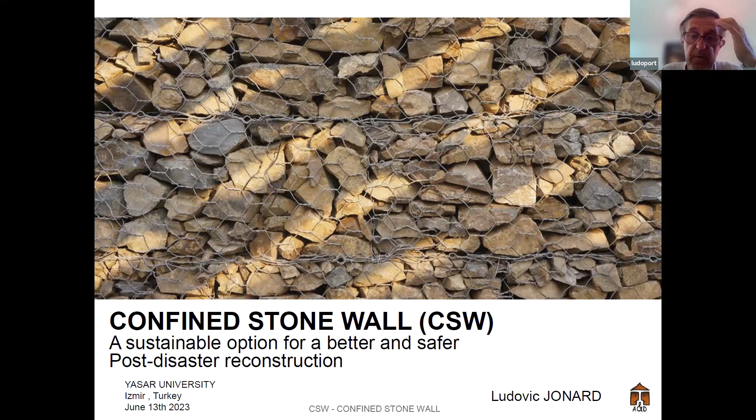So first of all, just a presentation about who we are. We are an NGO. We are based in Paris. We are called Architecture and Development, and I think the name speaks itself. It says that we are architects, basically.

We have also been academic. I was myself a teacher for 10 years in my school, and we have also this idea of teaching and learning from others, and also teaching back to new architects how can they use different options and alternative solutions for developing countries. I put developing countries in terms of non-advanced countries in terms of construction, which is not, of course, the case of Turkey. But we decided that we had to build a new concept and new approach for those specific countries who cannot afford the high standards, who cannot afford to have, unfortunately, good expertise and still need to have decent habitat.

So the NGO has some expertise with technical aspects. We also do some advisory to reconstruction projects, can be like donor agencies, or can be some foundations who want to do projects and they don't know what to do. So we advise them to make some surveys, to make some assessment studies, feasibility studies, and we also do design and project management, but not as a company, not as a private company, because we are an NGO, we are a non-profit organization, and we don't have at all the same capacities.

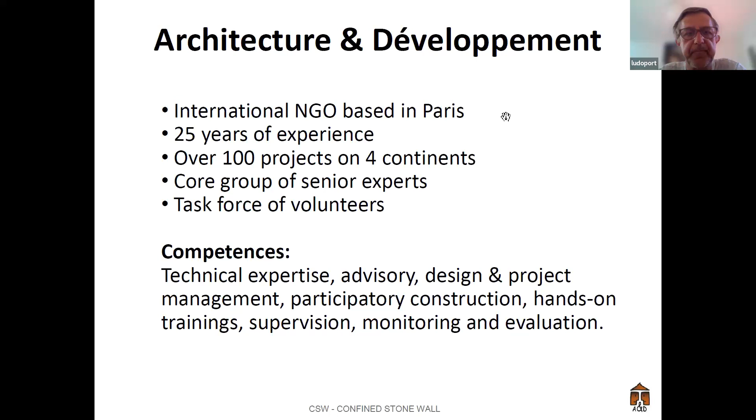What we want to implement as an NGO is to create processes which have a holistic, global approach on sustainable habitat. We think habitat is a right for the people. Besides living in poor conditions or being affected by a disaster, people deserve to have a decent habitat, and when they are affected, they need a decent reconstruction. They have a right to be properly reconstructed, which unfortunately isn't always the case.

So we are not only technicians. We do not produce pure architecture. We also have a social agenda. And of course, it has to be cost effective and affordable for the people.

Nowadays it's becoming very crucial to have environmental concerns, because sustainability relies on non-pollution and impact on the environment and nature, which is a big problem today, not only in regular building processes but also in post-disaster reconstruction programs. So what we want to do is improve the quality of the built environment.

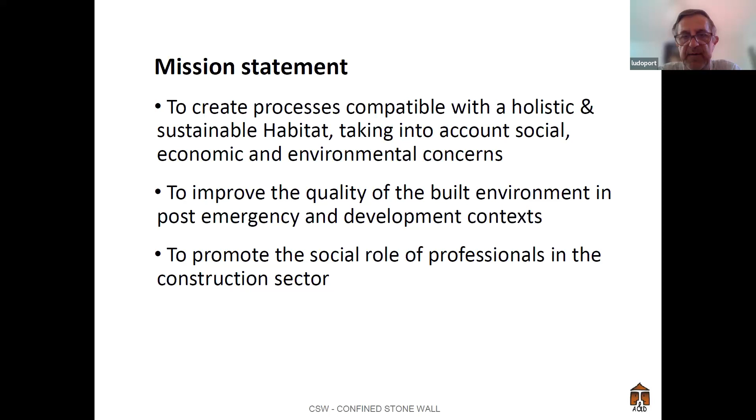So let's come to the issue of post-disaster. I made a brief list of issues that we've encountered during the 25 years of activities we've had, because post-disaster is a crisis period, and we have witnessed many problems about what to do after a disaster, and an earthquake is often a strong one.

What is the problem caused between the need for emergency and the emergency of building back better, as we say. For us, for architects, there's no solution for emergency. Architecture is not an emergency solution. It has to be in the perspective of long-term reconstruction.

But there's a gap between what to do in emergency, when people are left alone without shelter, and what to do after a few weeks when the victims are safe, covered, or hospitalized. What do we do with people who have no shelter after one month? And how long will they stay in that position until they have what we call permanent construction?

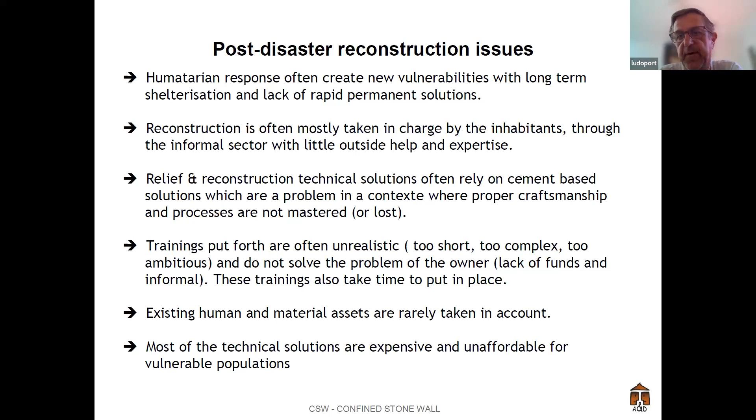Another critical issue is that many of the ready-made, nice, smart solutions are very expensive. It's not cost-effective, it's not affordable for the people. Because most of the time the people will have to pay for their home structure, they will rebuild badly, and it creates new vulnerabilities.

Other issues, and I think it's more related to Turkey: when the earthquake or disaster happens in rural areas, deserts, semi-desertic areas, or mountains, there are many issues about people migrating to the cities because they don't have a perspective of rebuilding in the same place. There's a tendency for the population to flee away to suburban parts or cities, which is not good for urban planning and management, and it creates family divide and economic divide in some regions.

So social or low-cost housing is not easy to plan, and rural families do not accept these standards because they are used to single houses, not multi-story buildings. It's a great gap, and it's a break in the life of those families.

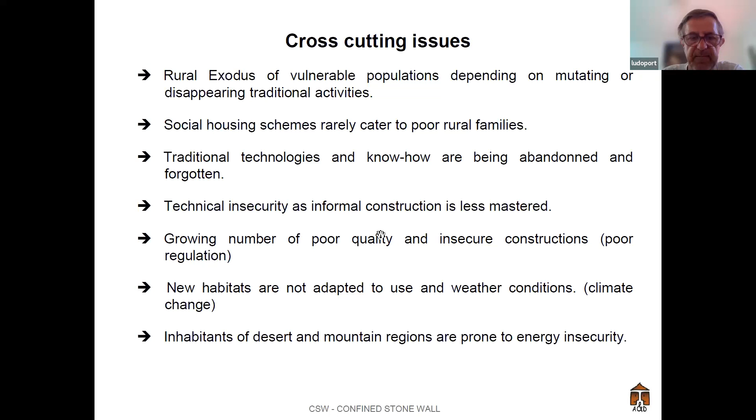There's no magic and no miracle. It's a long way to understand what can be done, and each disaster or context is new, so we have to rethink the strategies, the approach, and the methodology for choosing the best technology, and not only the technology, but the overall approach to deliver appropriate habitat. So let's talk about alternative technology.

This has to come through a series of questions, not all of them, but at least some. What is the purpose of alternative technology? Alternative technology is a response to bad housing, energy insecurity that I just mentioned, and climate hazards.

This is actually the basics of what we would call decent housing. The right to decent housing for all, which means wherever you come from, whichever country, whichever ethnical background you have, or whether you are rich or poor, you should live in good conditions, at least human conditions. So technology has to address those issues, and alternative technology is also something you can source locally.

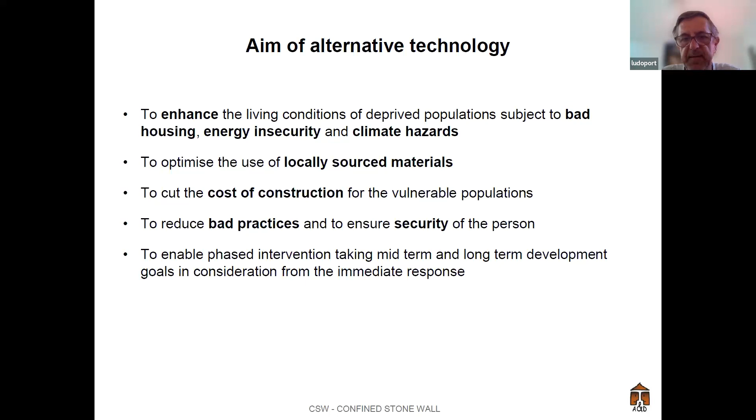When you have a disaster, you have lots of international solidarity and money coming from governments or international organizations at the beginning. After one or two years, or even after six months — like in Turkey, I don't know if there's so much money available today. That's also a reason why we should go for technology that ensures the house delivered can be properly managed and maintained long term without much effort.

So let's go to the core issue — one of the alternative technologies we have experimented with for the last 15 years. We call it confined stone technology.

Not gabions, for a very simple reason — it's the same, sure, but we call it confined stone wall because gabion is the technical word used for public works. Usually you use gabions for retaining walls in the mountains, or for dams. So we call it 'un mur poids' in French.

I think it's a weight wall — it uses the weight of its structure to withstand and retain the forces that come from a slope in the mountains. So it's a static definition: what a gabion does is stop the force that would cause the slope or part of a mountain to slip. With its strong, heavy load, it's a load wall — the load creates the strength, but it's not active.

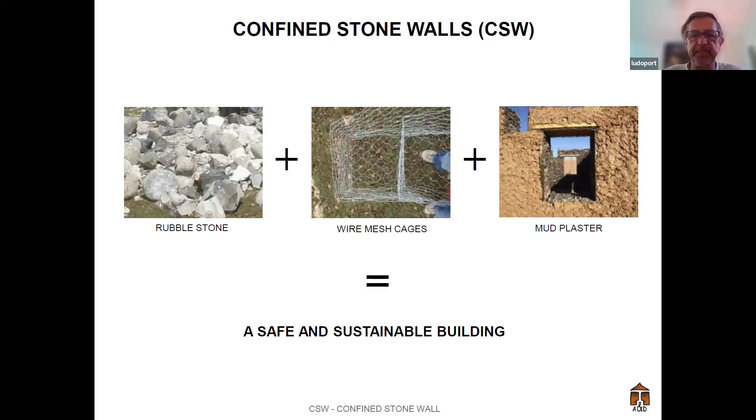And there was no access. Logistics was very poor. There was no material affordable. Cement and iron was very, very expensive, and no roads—only the donkeys would come, and so on.

So we said, what to do? And we realized that the people were traditionally building their homes with stone, limestone, and they had some kind of reinforcement for earthquakes, but not really.

And we said, okay, there's a huge amount of material already—stones were available—and of course many of the houses had collapsed, but the roofs were very heavy with earth. So the weight, the load of the roof, had collapsed and brought down the structures. So we said there was something to be done about earthquakes.

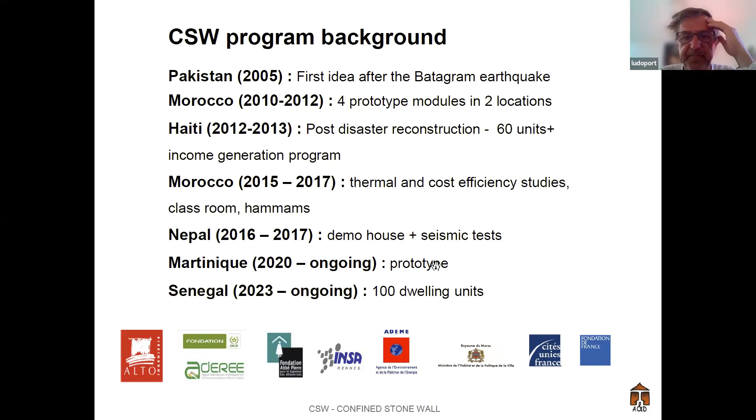So again, the principle is stone and wire mesh. We make cages with that, put them together, and put plaster inside and outside to keep insulation and avoid any problems. And we have a kind of house, and all the houses are locally adapted to the context, made with as much local material as possible.

This one is in Nepal, and we keep the typology, what we call vernacular architecture, where people are used to living the same way. If you didn't know, you'd think this is a mud or earth house, and most of the time we were working in regions where people live in mud houses. Of course mud houses are not quake resistant. This one is quake resistant.

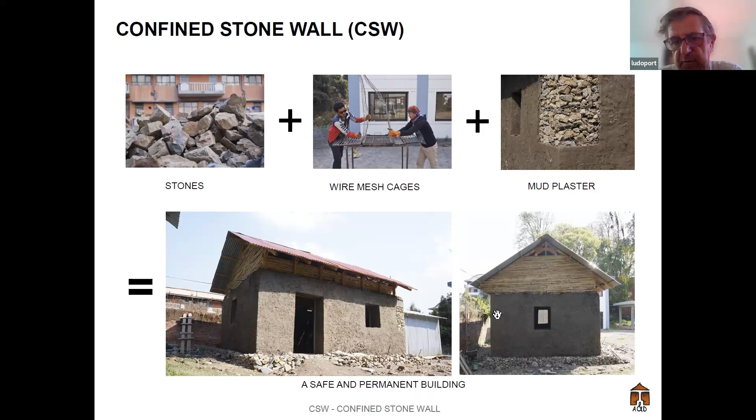So the principle in terms of concept design, as I said earlier, it's not only the technology, it's the geometry and the way all of these combine together—the form, the shape, and the way the forces during an earthquake will react with the principle of earthquake engineering.

To be straightforward, we've tried many designs, and it's always a one-story building—we never came to a second story. We think it's because we're not yet able to qualify this technology through norms and standards, even seismic standards, because they don't know these technologies. They would use reinforced concrete systems to modelize it, and it doesn't work.

So it's not safe to say, even though you run it through software that calculates the behavior, it doesn't work. So we don't want to take any risk. We said we are not going to do any multi-story building—we only go for one-story.

And sometimes in Haiti, for instance, we made half a story—half the basement, up to 1.5 meters, was in gabion, in CSW, and the superstructure under the roof was a wooden structure, braced so that it becomes seismic resistant.

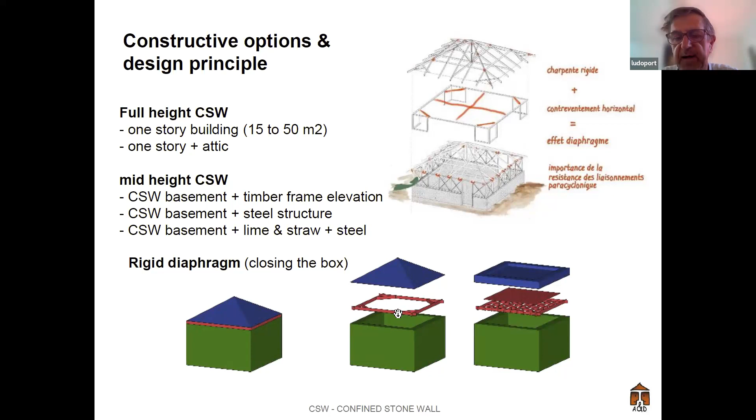It can be whatever, as long as it plays the role of stabilizing the top of the wall, because the top wall is the weakest part of the structure when it shakes. So we need some kind of reinforcement which crosses the forces laterally from both sides as a plane, and that helps the box not to break. That's the main principle.

So what's interesting is that, as I was talking about earlier, it's a bearing wall system. There's no posts and joists, no columns and joists like what we see everywhere today, including in Turkey. We have a bearing wall—a long continuous wall, 40 or 50 centimeters thick, which is very large, but it bears itself and bears the structure. So there's no foundation.

The foundation itself is the gabion structure, because it's very stable, actually, because of the thickness of the wall, which is 50 centimeters. The load on the soil is very spread, so the soil is easy to stand on. We can build these in swamps or into the water itself, almost without calculation.

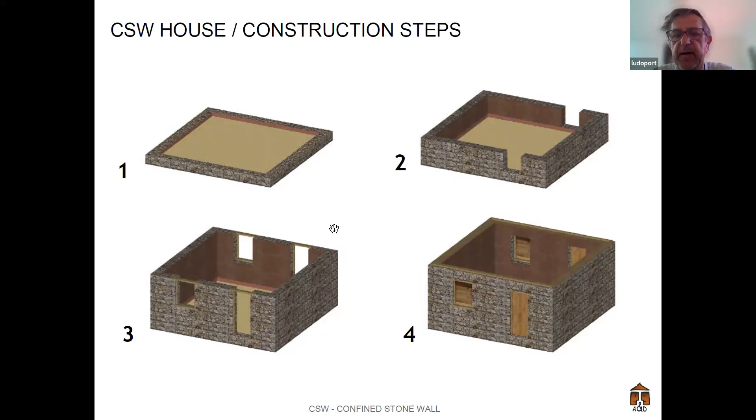So we build line by line, row by row. We put the rows, and we build up the structure, and then we put either a flat roof or pitched roof, whatever, depending on the typology of the way people live there. The idea is not to have a second story, but it's possible if you don't use the same technology. If you put a lighter structure on it, like a wood structure, it's absolutely possible to make a double-story building.

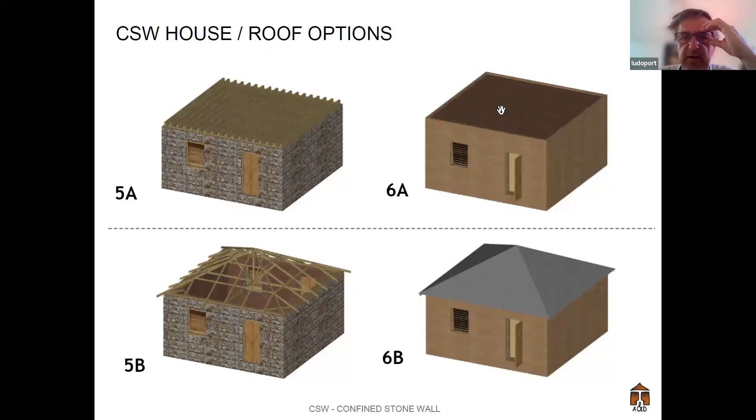So the principle schematic of making the wall is not to have boxes itself. Actually it's a U frame, and then a top and a cover, and we put them all together in line. We have rows of, let's say, 50 centimeters high, and we need 5 to 6 rows to go up to 3 meters, which is the average height of a building.

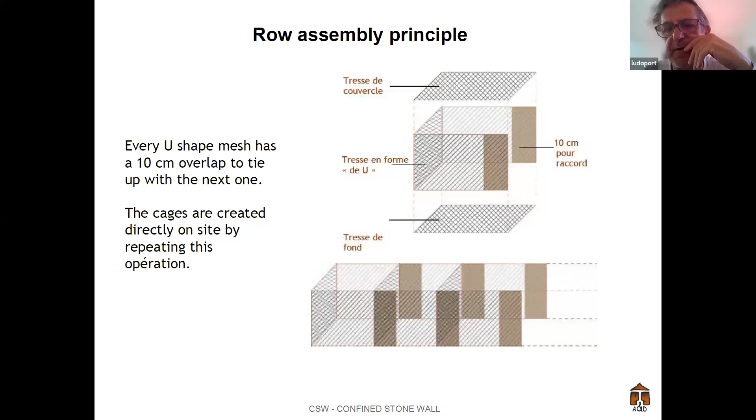What stone can be used, and this is becoming interesting, can be any stone. That is the beauty of this technology. Even round stones, like river stones, galets, seem to be okay, but not as good for seismic resistance, because they do not have enough friction points between themselves. It's less quality than the others, which are more like hazardous form. It can be any kind of stone, because what is required is that you use roughly the same kind of size.

But if you have big stones, you cut them into two, and then you put them in like this. You don't need to cut them properly. You just use stones.

So what do we do usually? We collect stones around the places. In Haiti, we were not working in the city itself, we could not, so we were working in the mountains with rocks. People would collect thousands of stones. We need something like 30 cubic meters to build a house in the Haitian design, which is a lot actually. But they have time, and it's free. We just collect it, put it somewhere, and use it to fill the cages.

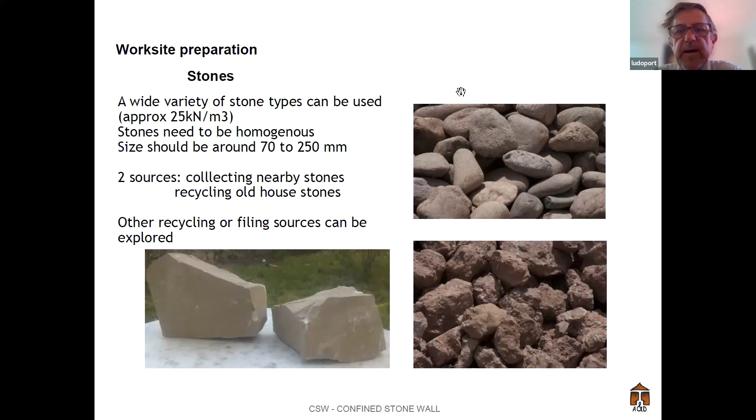So the steel wire, we use it - we don't buy mesh, we do it ourselves. Why? It's cheaper, it's easy to do, it gives power, it gives jobs to local people. You can pay them, and you produce your own material to make the cages.

So you buy this in bulk, and often it comes from China or Turkey. By the way, the steel is very Turkish in origin, and we buy it. It's easy for people to manipulate and to transport on location on site. We open a small workshop on site where we build.

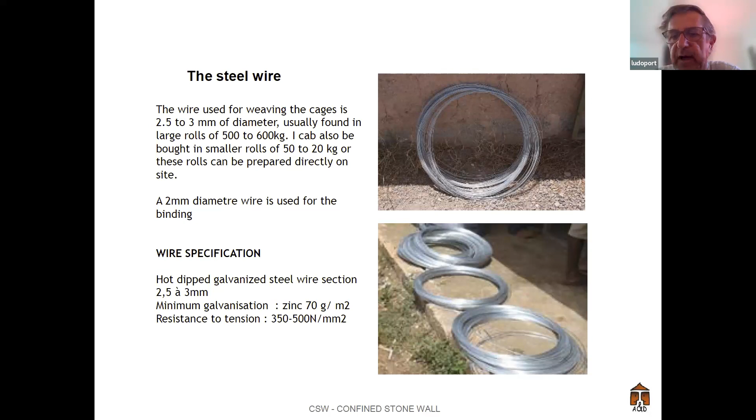So I'll show you some images. We have a workshop where we do knitting - like knitting - we knit the cages, and they're available directly on site to be filled with stone.

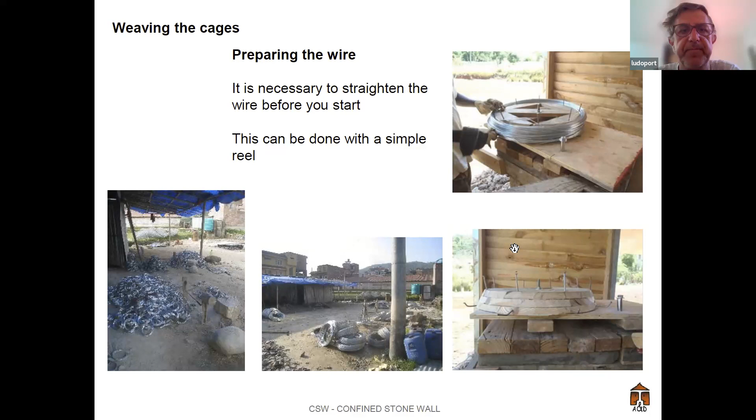So we prepare the wire. It can be different - we have some machines sometimes, or we do it handmade with nails, and it's very simple technology. But we open workshops and provide work to people, including women, because it's easy work and it's safe. We train them for 1 or 2 days, and then they can produce.

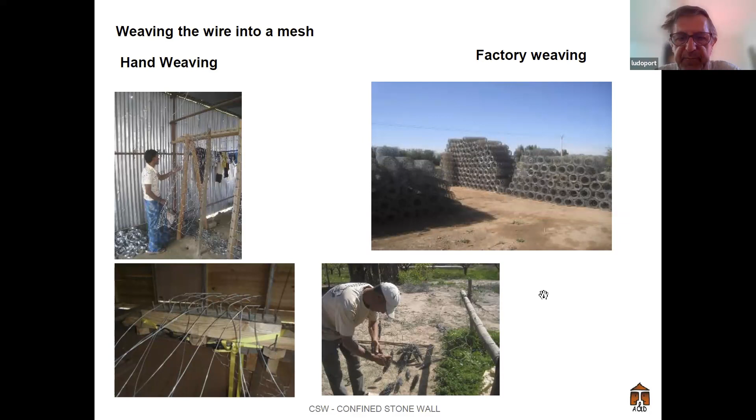So we were able to set up a cooperative kind of income generation program in Haiti, where they would produce and sell back their product to the project to make some money.

So we do have some specific tools or machines which are very handy to fold and prepare the cages to make them properly with the right dimensions and the right angles. It's very simple.

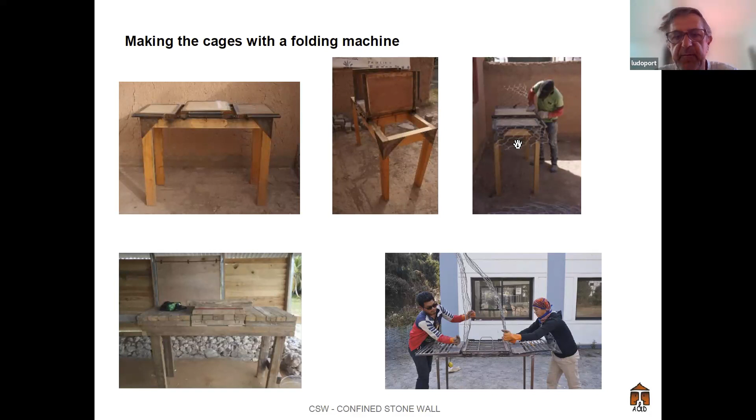We then start the construction.

So I said no foundation. We do not have foundations. The thickness and width of the first row is good enough to play that role. So it's very easy. You just need to dig down to the good terrain, the good earth, not organic earth, and then you can build. So we can build in very diverse contexts.

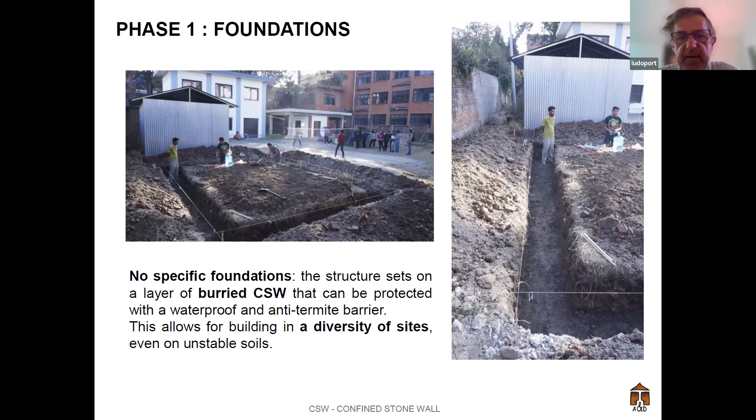So we start to put the cages one on top of each other. It goes by line. There's some framework to make sure it's very vertical and horizontal. But it's quite easy, so the training comes in here.

We need to train the people, local masons, but there's no cement at all. We just put the stones like this. It seems a little organized because the stones we're using had flat faces, but usually they're not flat at all, and you don't need that because it's going to be plastered after some time.

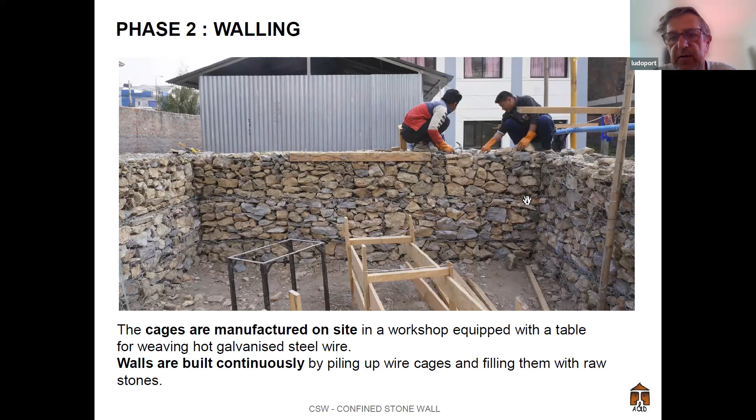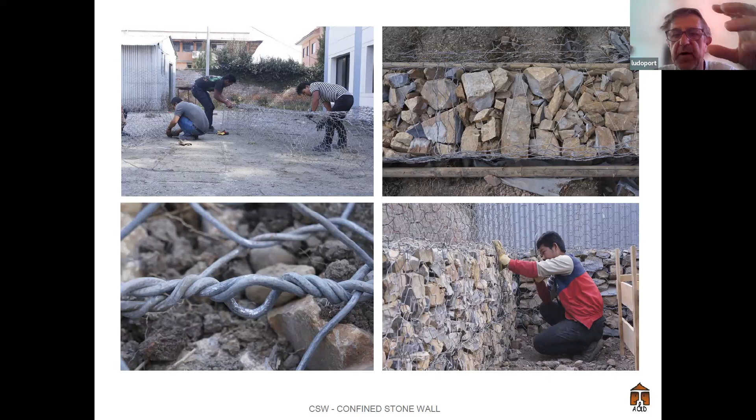So you see the cages and the details, because there's some reinforcement between the cages to avoid the wall becoming fat. So we need to put some ties of iron just to avoid the wall becoming fat.

Then we need to put the frames, the window frames, the door frames, which are inserted into the wall without any cement, any sealing. It goes like this because with all the structure and the load of the cages, it stands, and then the windows will be put inside.

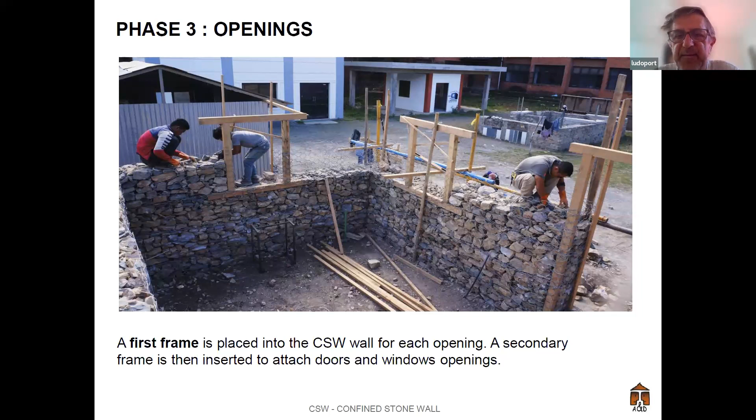This is very basic construction, but it was very relevant to the local construction, and very much alike. Nobody was complaining about this being so different. Except for seeing the cages in steel, you wouldn't make any difference. The typology remains the same, and then you see some details about the frames where to put the windows.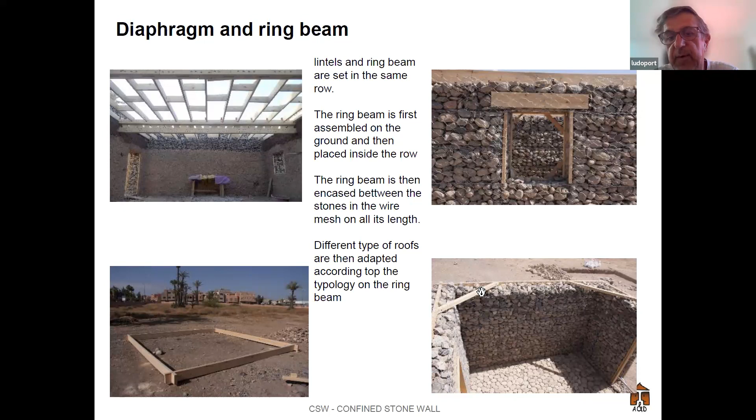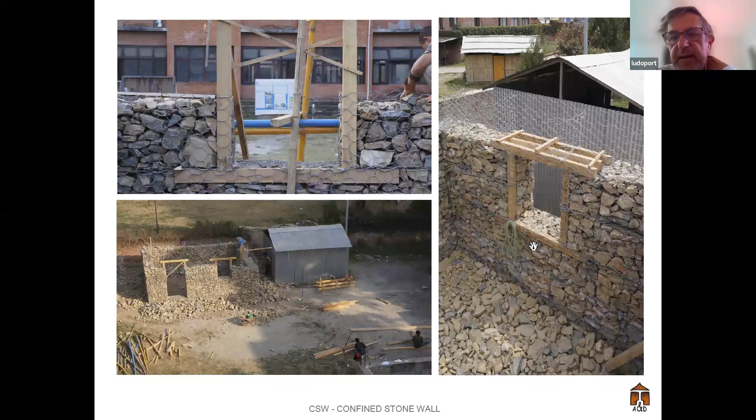We also use some local material for reinforcement. In this case, you see there's no flooring, there's only one reinforcement by the corners. And it gives a structure which is ready to be plastered.

So sometimes we have wood, and we do seismic resistant trusses and carpentry work. But also you will see, this is seismic reinforcement made locally with plywood and nails, but it works.

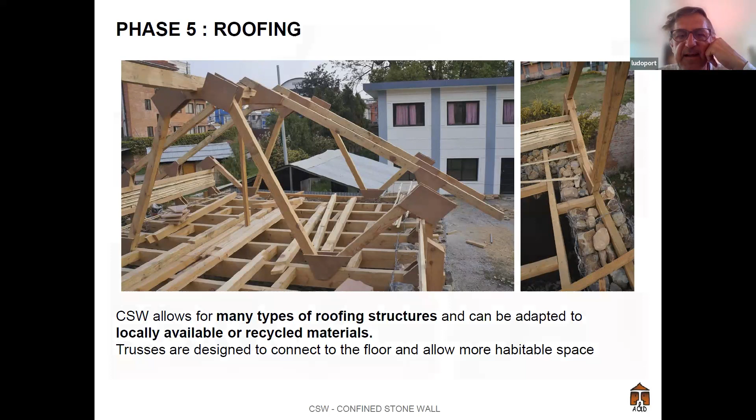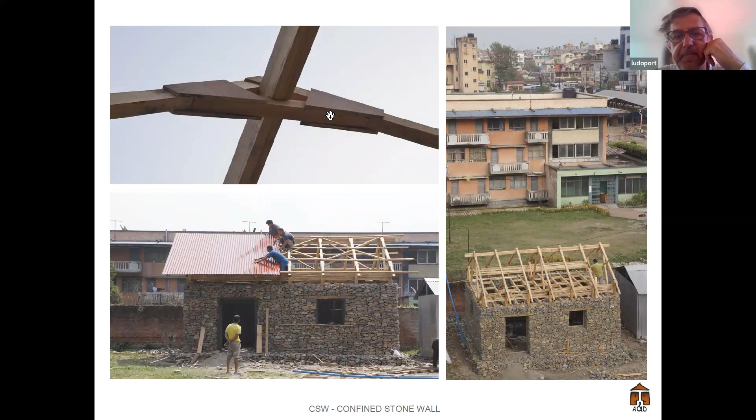So it's three dimensional, and it is design. It's not cheap design, it is design and engineered. You see some kind of assemblies there which seem very simple, but which are very calculated. And this is low cost.

Locally, this is wood taken from the palm trees in Morocco. We recycle the palm trees, which are very bad quality for construction, but for the sake of the construction it's okay. And you have a roof with a mud plaster on it, for insulation purposes.

And you see here some detail, for instance in the back, on the left and right side of the picture. That is a very critical point, which is the end of the roof, and this also is calculated.

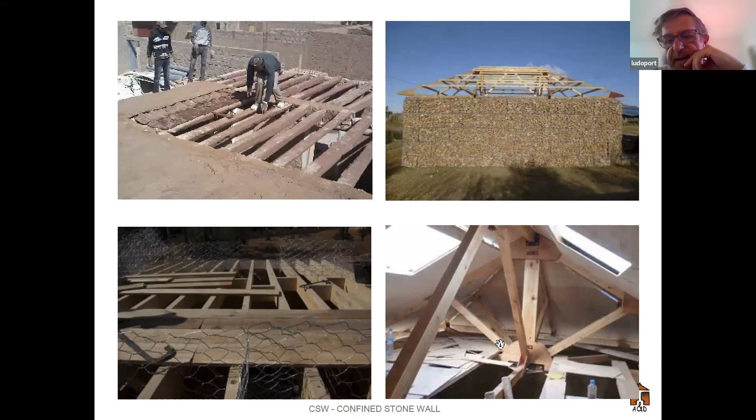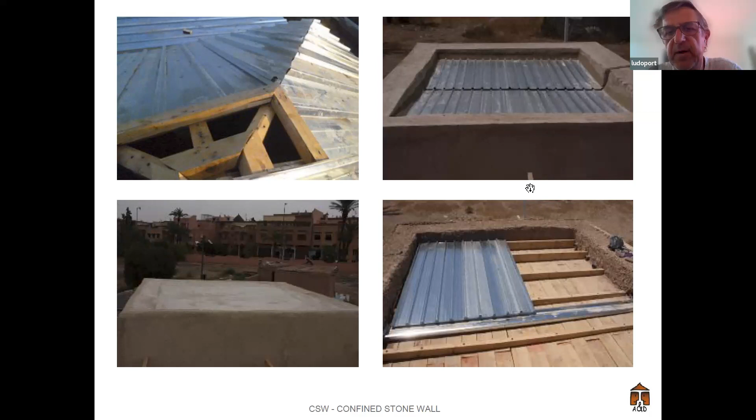Some options where you put some iron sheets for waterproofing or not, it depends what you want to do. So you keep the shape of a very typical Moroccan style with a flat roof, and we do have some iron sheet to preserve from the rains.

Again, you see how we do the finishes. So it's not only finishing; it's also giving quality, insulation, and safety to the house, and also protecting the wire, the steel. It's stainless steel, but still stainless is not stainless, as you know.

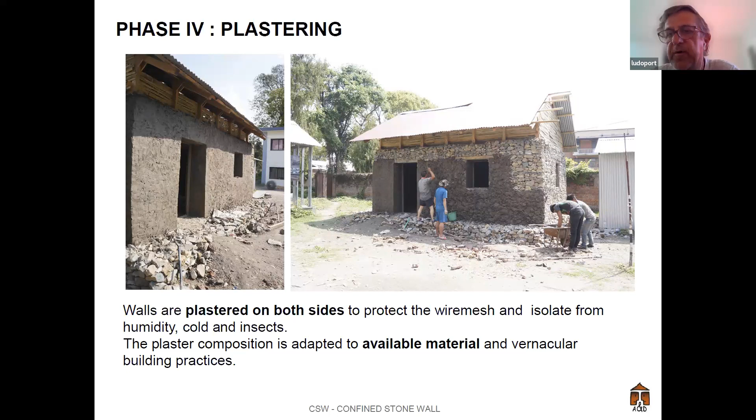After some time, the steel may have problems of rust. So we always cover the structure with plaster and mud at the beginning, because there are many holes. The first layer is plaster, sometimes with straw, then a thinner coat of earth, and then we make a mix. The finishing is a mix of plaster with clay, lime, or sand, whatever we find locally, to make it stronger and resist mechanical erosion like winds or heavy rains, so that the plaster is strong.

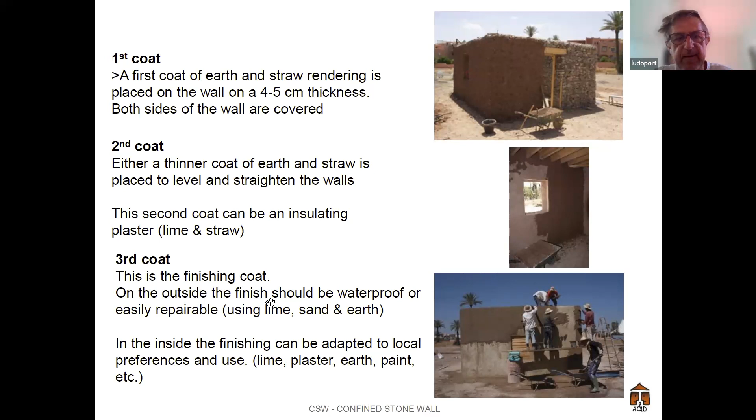So, the question we had in Nepal is: are the population able to do it themselves? Can it be self-help construction, or owner-driven, meaning can people build themselves or organize to build and contribute to the construction? Maybe not only as manpower, but also as a designer or in monitoring. That's typically the added value we bring as an NGO compared to a contractor or a private firm, because we think we can push forward the building codes and do tests.

We do a demonstration unit with the university to convince the local people and engineering staff that it's possible to build these non-traditional or non-academic, fancy technologies.

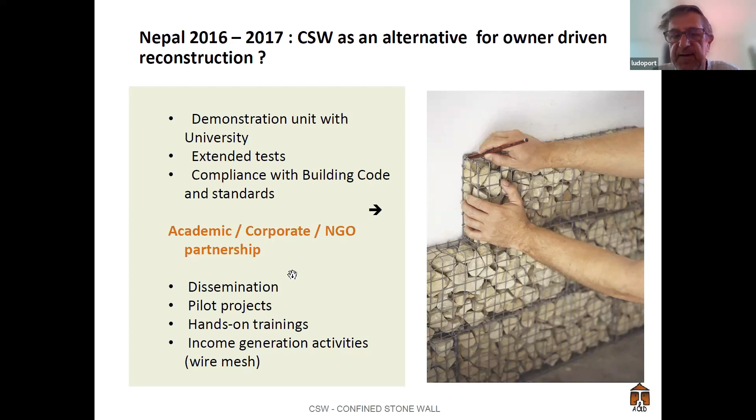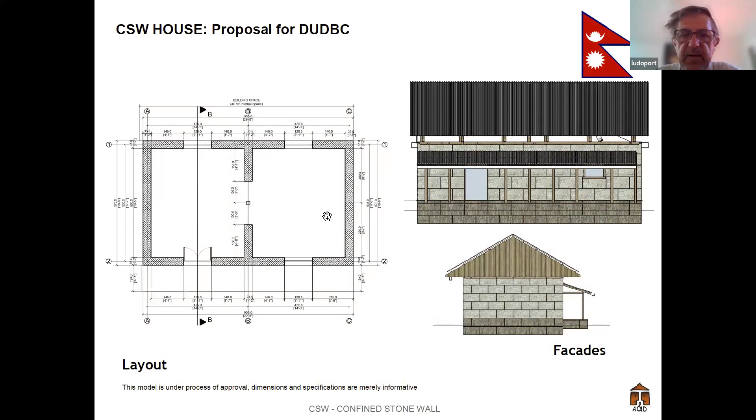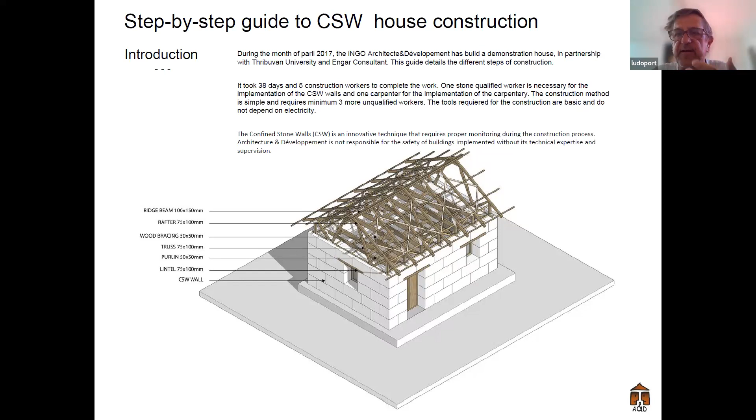An example of a demo house that we made in Nepal to showcase how it can be built. We tried to put this into the building code. It didn't work, and we were a little disappointed. We tried to comply with all the technical descriptions, but the description given by the Ministry of Construction was not compliable with this kind of alternative technology. This is a problem that we have.

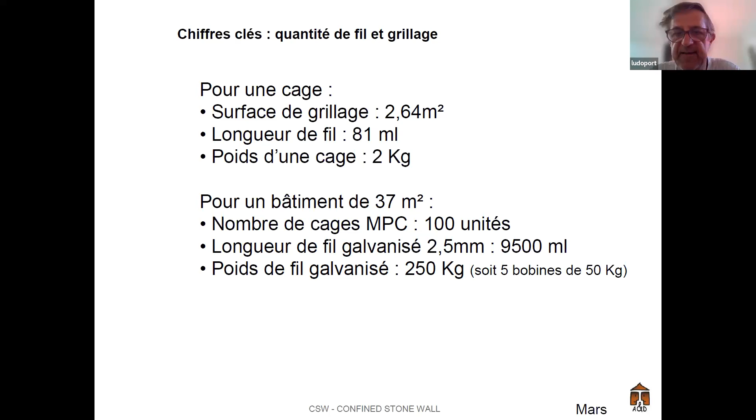Some figures, I'll give you in the presentation anyway—figures on how many kilometers of mesh you use, what is the weight of one cage, and so on. When you do the calculation, you see that you use 250 kilos of galvanized iron, which is not a lot compared to reinforced cement. Of course it's not a perfect solution, because there are always advantages and disadvantages, but it's interesting to have some comparison with other methods.

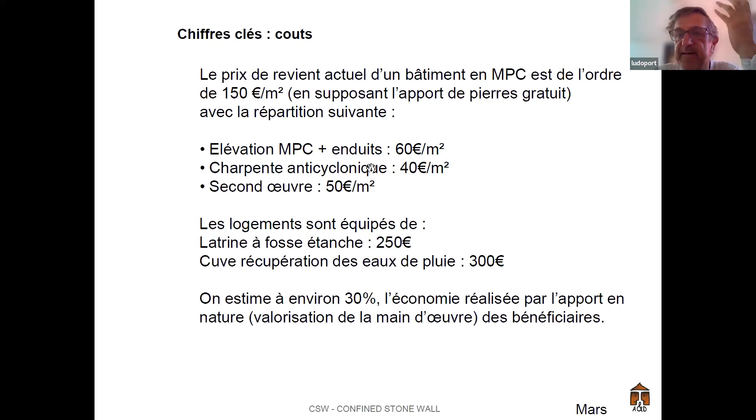As for the cost, maybe these figures won't mean much in Turkey, but we are something like 10 times less than traditional construction—that's the main figure we have in mind. It's very attractive, but a lot of this savings comes from volunteering work and from collecting material for free. For instance, stones are free of cost if you find them around. What is expensive is transportation.

These are a few examples of what we built. We show this to demonstrate that the building is made of gabions—otherwise people would not understand or trust that there's stone like this inside, because it looks like the mud and plastering they use locally in the villages.

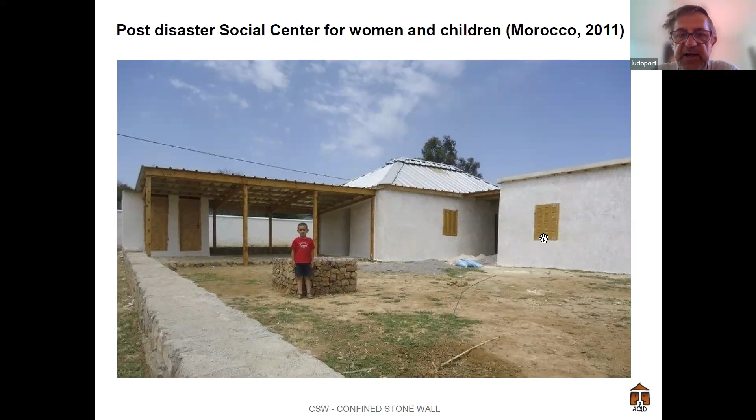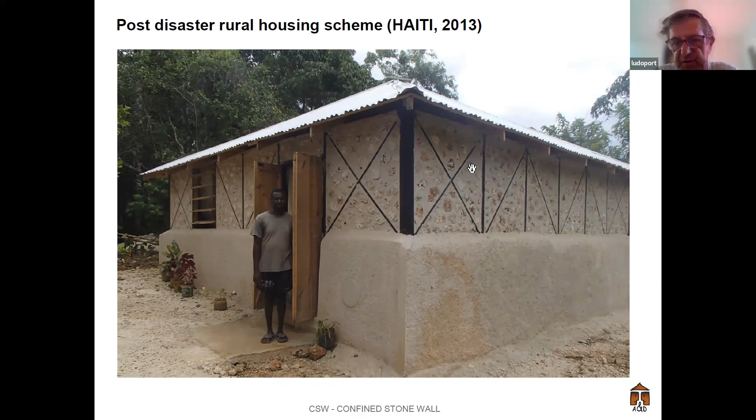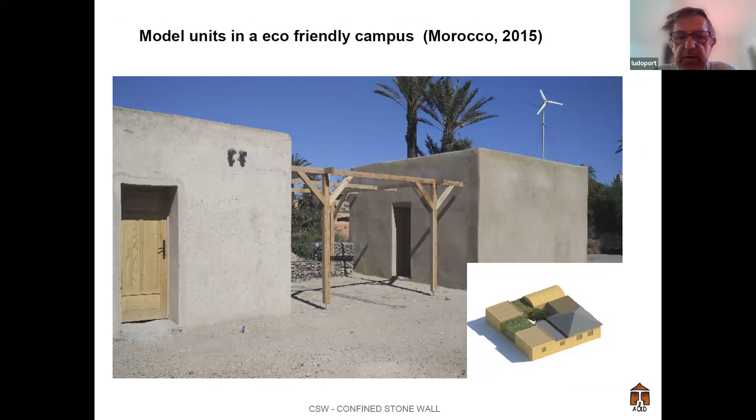What is stressed is that it's a dry technique—no water, no cement—so you don't need tools, you don't need a crane. You need only a hammer and some scissors, and that's it. You can use unskilled labor, train people easily, and the technology is very strong. You can't really make mistakes, which is also the beauty of it.

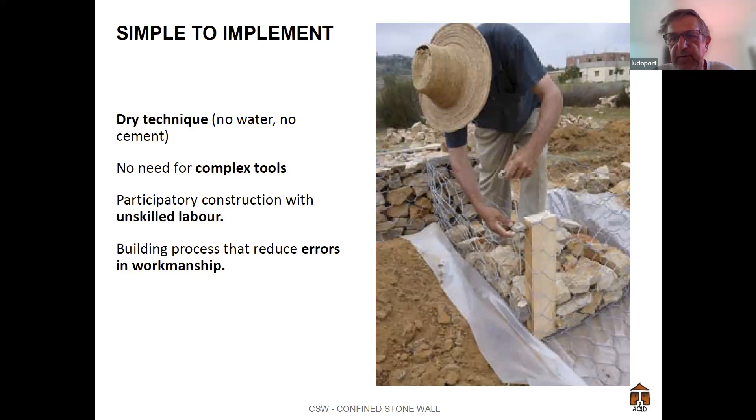It's modular—sorry, going too fast. It's flexible and can have many layouts. Of course it has limitations, but there's diversity and it respects local architecture. It can be built in very remote areas as well.

I'm going a little faster because I think we're running out of time. We can modulate—it's a modular plan. We can make several units, and in between you can make buffer zones with light structure that saves on construction. So with a little smart thinking, you can really build an interesting structure without building everything.

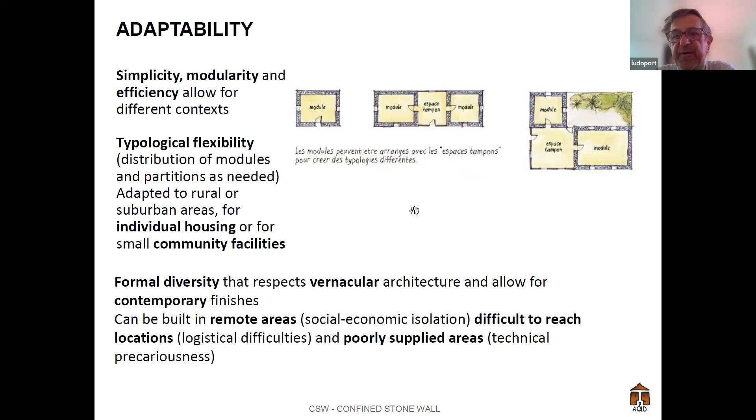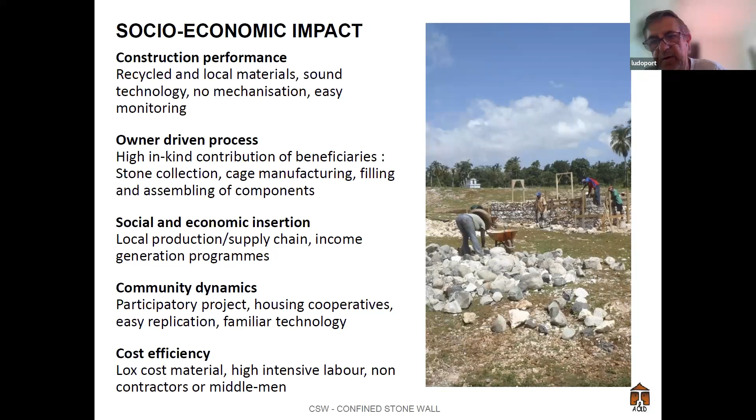As I said earlier, people can build on their own. There is income generation, people participate and benefit from the reconstruction, it creates some economics as well, and the community helps itself. One family can help another to build the house, and this kind of setup.

In terms of performance, there's a nice interest in terms of CO2 emissions. It's very low and has low gray energy. It has some thermal insulation, depending on the climate, but usually it's quite interesting.

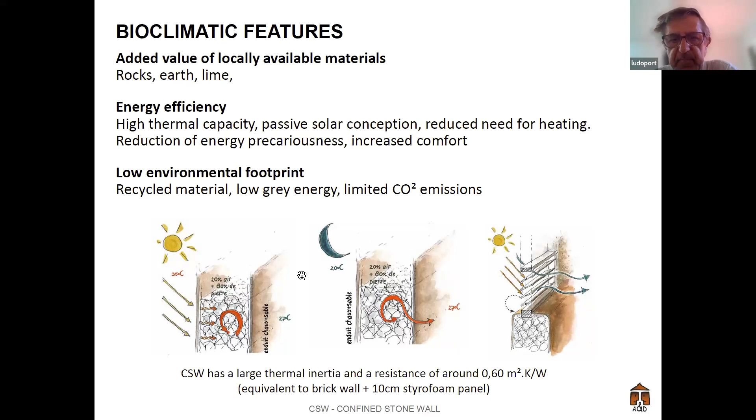It avoids the heat during the day and preserves the cool during the night. It's a passive house in a sense, there's no need for more, and this is the principle. A normal wall will collapse after some time of strength or constraint, whereas a Gabion wall will not. It may deform, but it will never collapse. That's the truth.

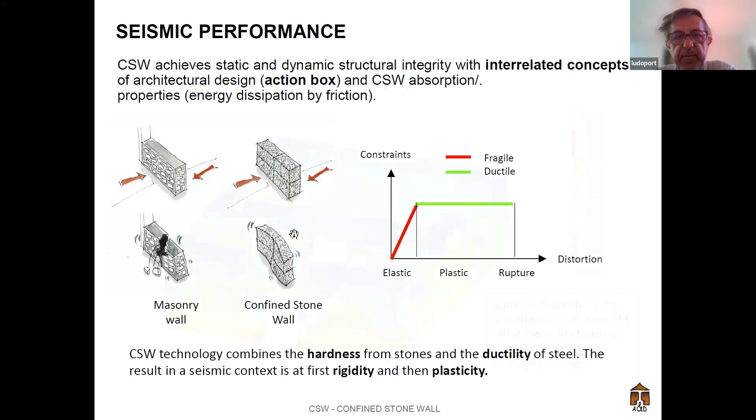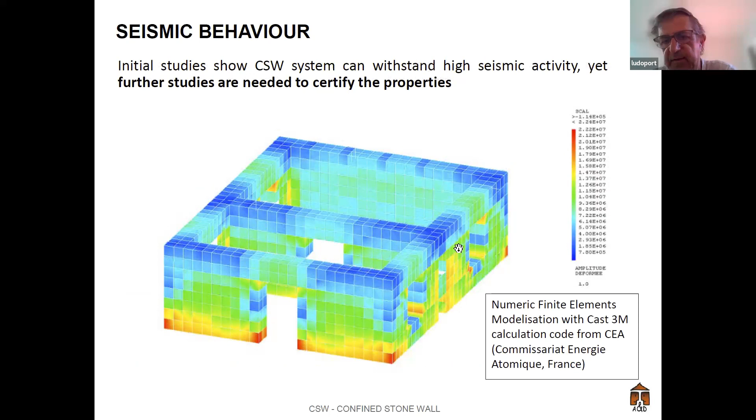So how do we know that? We made some modeling on finite elements with very high range software in France, in a lab at a university in Rennes, and this was done 15 years back. This is where we see the weaknesses of the walls, depending on the openings and so on and so forth. We made some calculations.

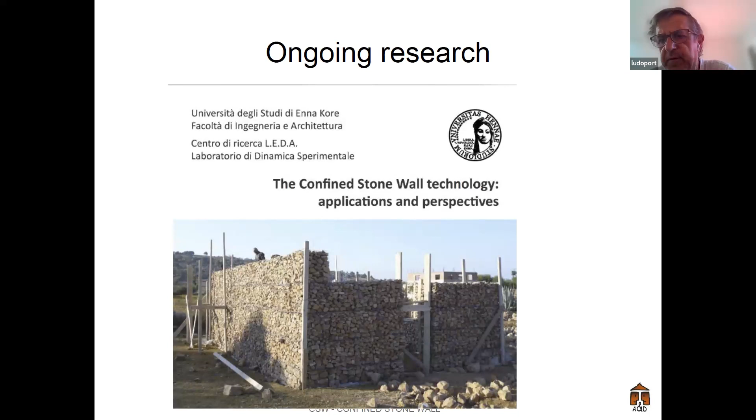We also made research with a shaking table in Sicily. I know that in Turkey you also have shaking tables for seismic construction. So we did one campaign in Sicily, which is not over, but we shook a test wall at a very high acceleration, replicating the worst earthquakes.

Of course this is only one piece of wall, and as I explained earlier, it doesn't work with only one piece. It works, but not enough, because it's not only the technology of the piece which works, it's the geometry, it's the architecture. As I said, the box plus the diaphragm.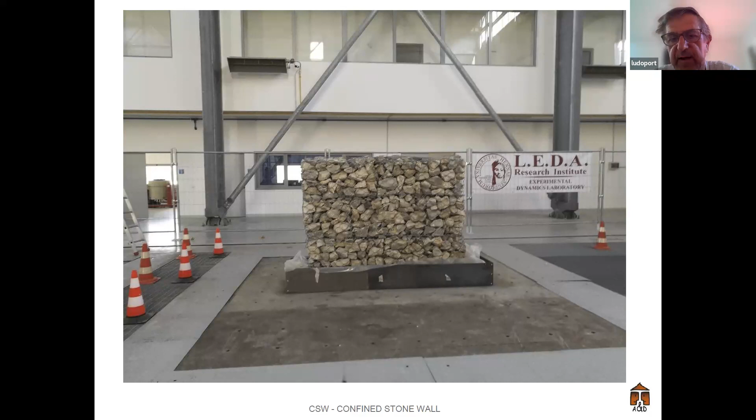So this was relatively successful, and we are still documenting, still in the process of finding money to continue the research. And this is the project we have in Senegal.

This time we have a story, but not with Gabion - there's just a small wall, and the structure goes up a little to the second story, but then the upper floor is a steel gauge structure which is also seismic proof, but will move differently from the bottom. It could be seismic resistant, but the good thing in Senegal is there are no earthquakes.

So we do implement, and we have the same project in Martinique, this time in the French Caribbean, where we do a prototype with a specification we are currently trying to put through French regulations. This time we are going to certify the technology through a specific process with the French administration.

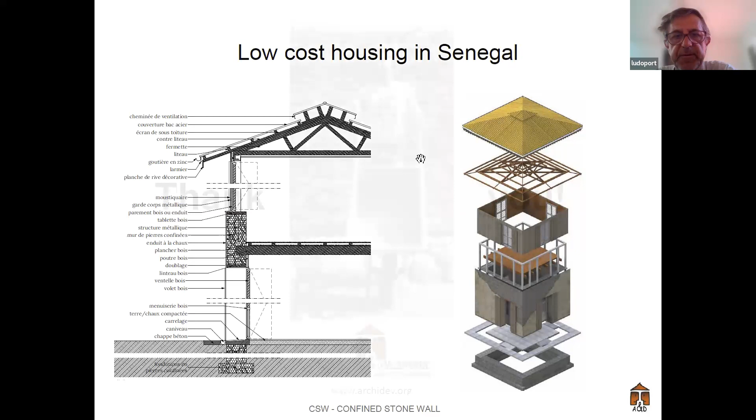Thanks a lot, Ludovic. Yes, you were a little late about what you said, but it was not too long for us, so that's perfect. I was really happy to hear, especially that you started not directly on the technical part, but the background about alternative materials and construction techniques, exactly what we are working on in this association, reminding us the aim is not only ecology or sustainability of the materials or health for the people, but also affordability and ease of use. So that was really good to remind us.

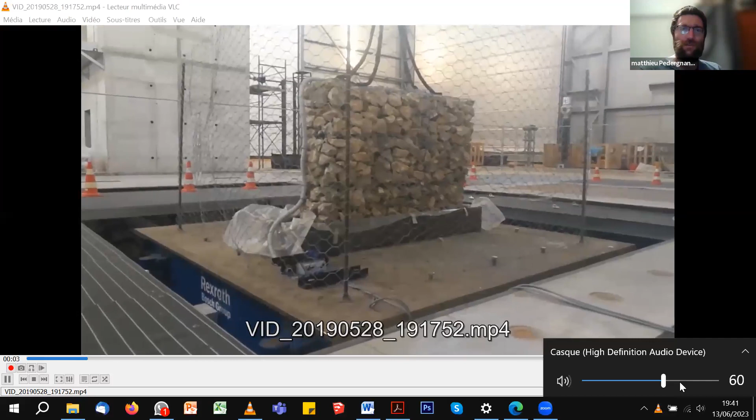This is the test that we made. Can you hear me? Yeah, sure. Okay, so you see, it's shaking a lot. I don't remember what was the limit, but the thing is that it didn't collapse - it should not collapse or break at all. That was a very good test for us.

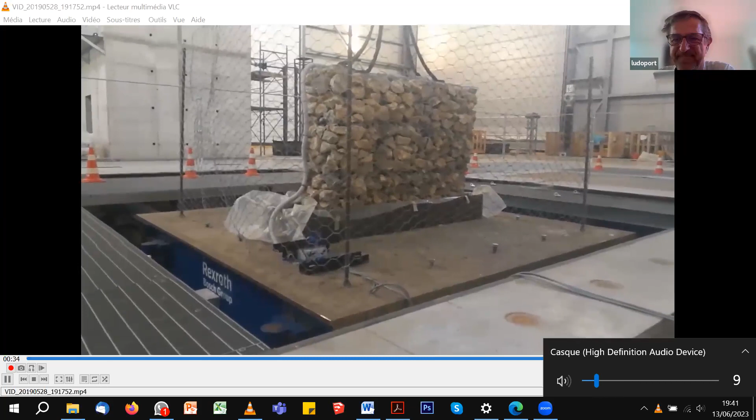No problem, that's good to see that those tests are happening, because that's how people discover the quality of the work. Thanks for sharing this video. I was really happy to hear about this, and before I start with two questions I have, because I was really happy to hear it.

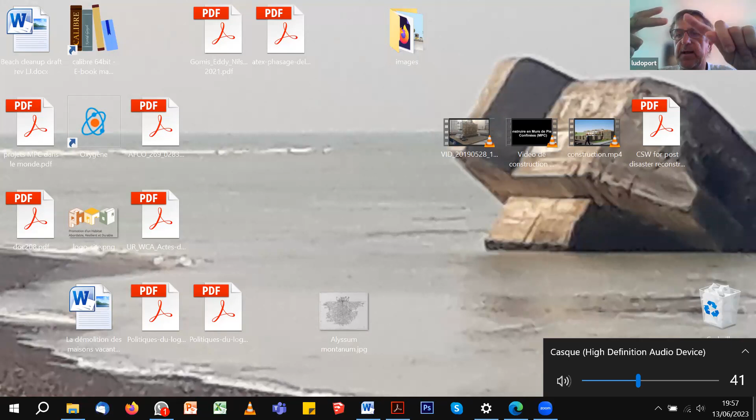We are not the local architect. We have a partner. We are never the local architects. We are not allowed. We are an NGO. We are not a firm, and we do not want to take the responsibility. So we always have a local partnership. We follow the regulation. We do submit building permits and so on. It's not at all fancy work, or because it's solidarity or humanitarian work, that it would mean no regulation.

No, we do want to make it normal, and we also advocate to the local authorities, the administration. So that's very important. You are controlling afterwards, or giving this control mission? Well, usually what happens is that we stay during the construction, because it's self-help construction, a contribution of the people themselves. So we hire some local firms sometimes, but we do control.

I appreciate your question, because it's a very tricky question, but it's a real question. The responsibility in case of a collapse of one house, and in case of some problems, who is responsible? Unfortunately, in the humanitarian sector, nobody is responsible. Once you've done your work, the people go back, the big organization leaves the country, and then people are left alone.

The problem is that to avoid this, we go through local architects or local engineers to secure the drawings. But as always, there's no insurance, and if you want to go for insurance, it costs double or ten times the cost of the house you're building. So you make efforts to downsize or reduce the cost, and then you'd pay a huge amount to a global company who will make money out of it. So it doesn't work. That's the limitation of the work.

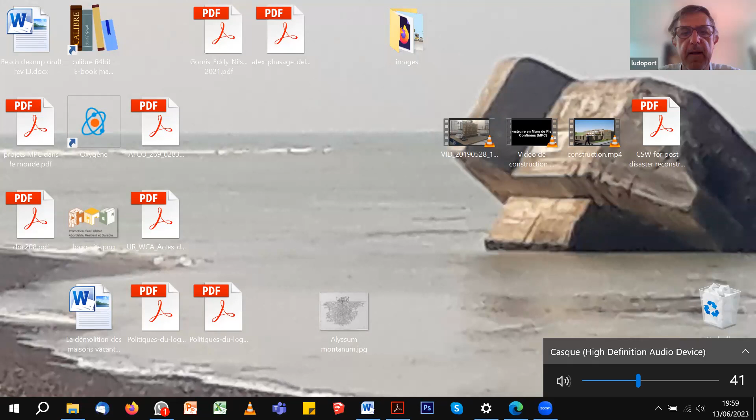Yes. How do we find the funds? Huh? That's what I'm reading. Yeah, well, we find it, but it's very difficult.

I used to say that being an architect, I don't have my own practice. I never had - my practice is actually through the NGO. So we do not earn our money that way, and of course we do not have fees. We do pay some costs and cover some sometimes, but what we do is design projects - I mean projects in the development sense, not architectural.

We design development projects for donor agencies. These are banks, development banks - I say World Bank, but it's not the World Bank because it doesn't fund NGOs directly. But there are many development agencies where you can submit proposals with the objective of reconstruction, helping people against hunger, against climate change, and so on. We design these programs, which usually are not only construction - we do training too - and we make partnerships with other NGOs to submit proposals and get the money.